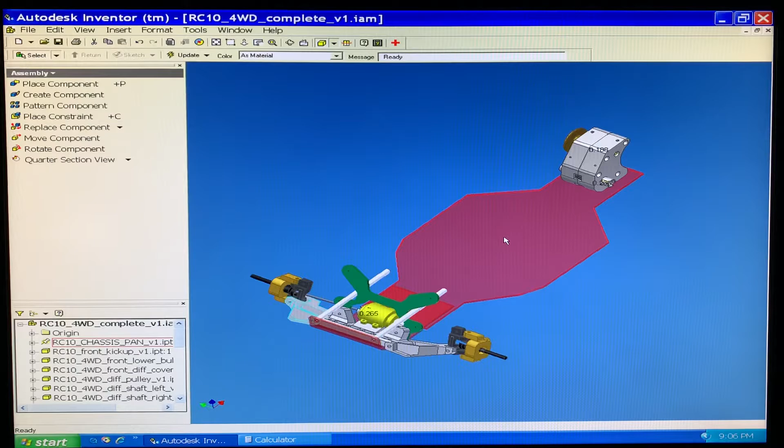As you can see, I've got a kind of mock-up chassis. The dimensions are pretty close for that. You got this front piece here. I tried to get those measurements as accurate as I could. It's kind of see-through there, so we can look through it.

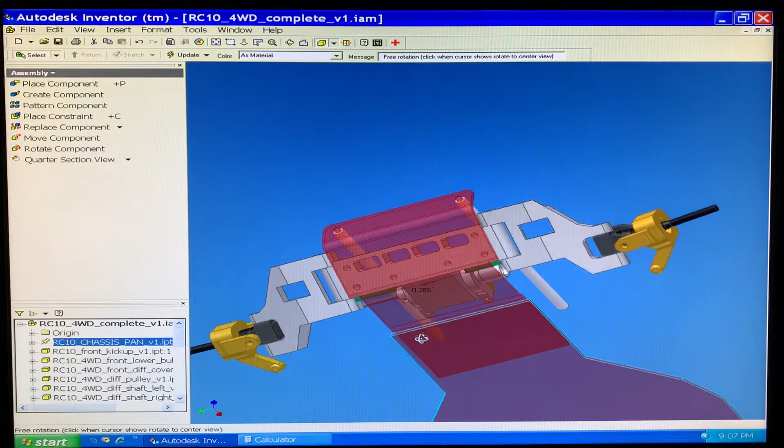So where did we get since last time? Yeah, I guess we didn't have a chassis, so there was just a rear gearbox and a front gearbox at that point. No big changes here. That's all the same. Everything's still in there, haven't done any mods there yet. I think that one's pretty solid.

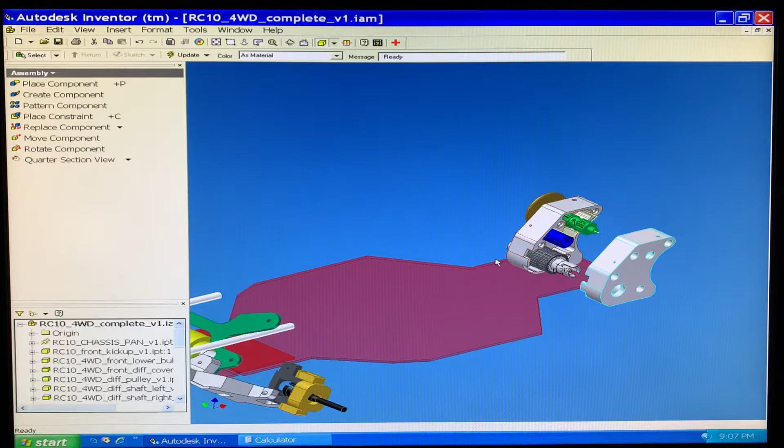Up front, we got a shock tower now, which ends up looking kind of like that weird frog that someone graffitied somewhere, I don't know where, but anyways it just kind of reminds me of that. But yeah, it looks a little crazy because I wanted these to tuck underneath where you would have the upper control arms, and then up top you got obviously the tabs for the shocks.

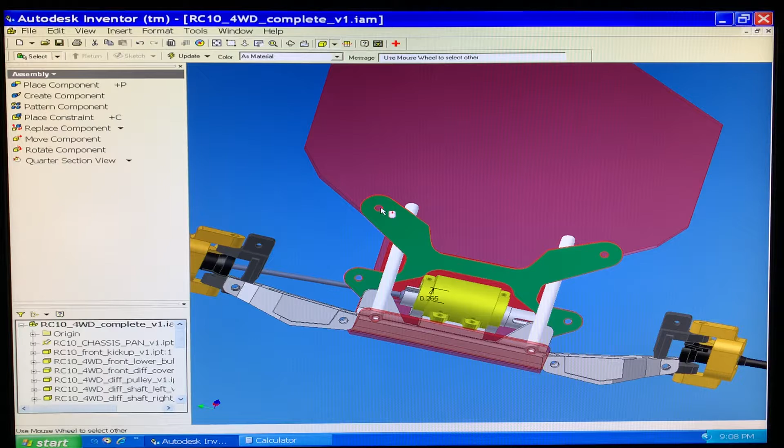These dimensions here, from the distance from the hole to the chassis, are the same as the standard RC10. These dimensions here from eye to eye are the same, so everything should have similar geometry as the standard RC10. These suspension arms are as close as I could get to the real deal dimensionally - from hinge pin to hinge pin, they're the same.

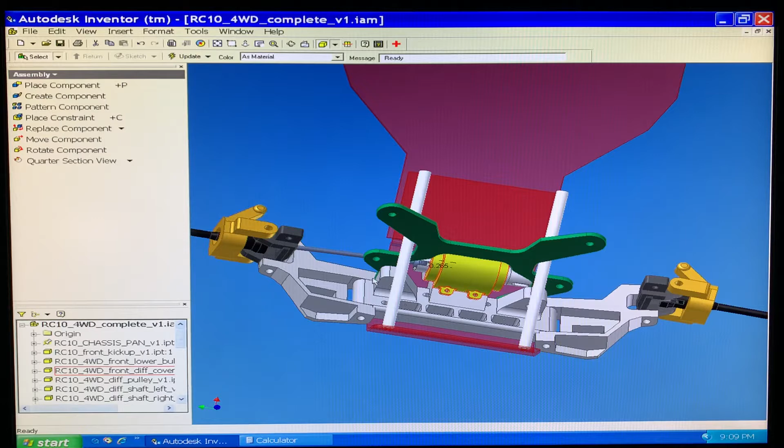So again, I want it to really look like a standard RC10 as much as possible. So I guess really the newest stuff, there's a dog bone in here. I haven't drawn it up with universals at this point because I have a feeling for the prototype I'll just have to go with regular dog bones. You know, obviously you would prefer universals, but at this point I'll probably stick with those.

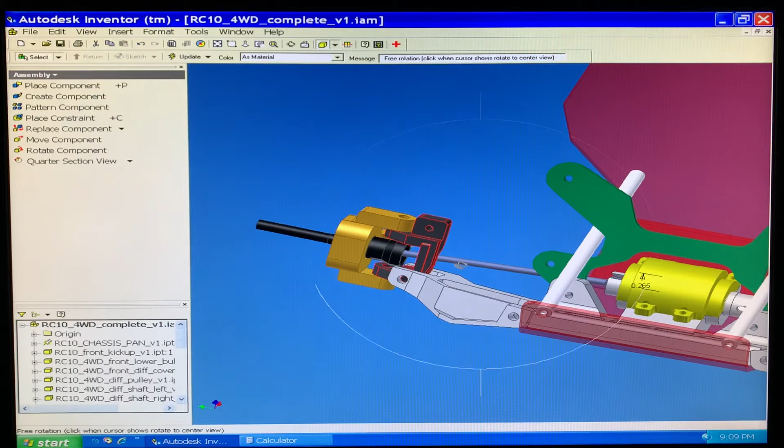But really the main thing I've done now is work on, I guess we're gonna call these uprights. So this piece in black here, that is very similar - whoa sorry dudes, I just put my computer to sleep, sorry about that, wrong key - that piece is almost identical to the original knuckle there, or upright. The only difference is there's this notch cut out so that we can have a dog bone or universal go through it.

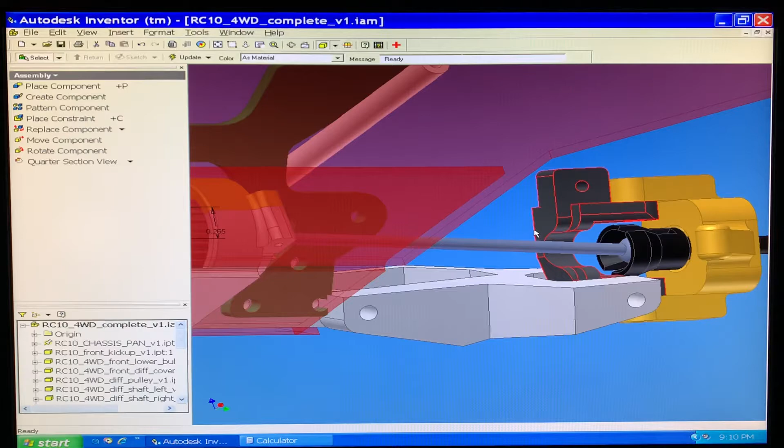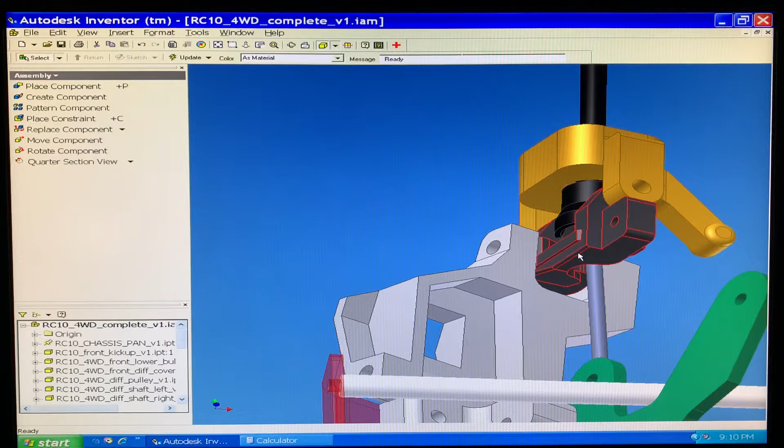I had to beef it up on this side and on this side on the front as much as I could. I added as much material as possible so that it wouldn't start to rub this guy at all, but kind of thicken that up because there's a lot of material missing now from that. Otherwise, it's all the same - the dimensions overall are the same.

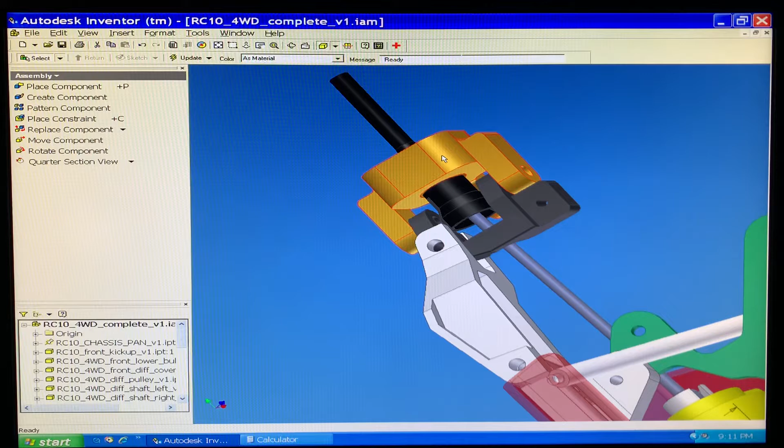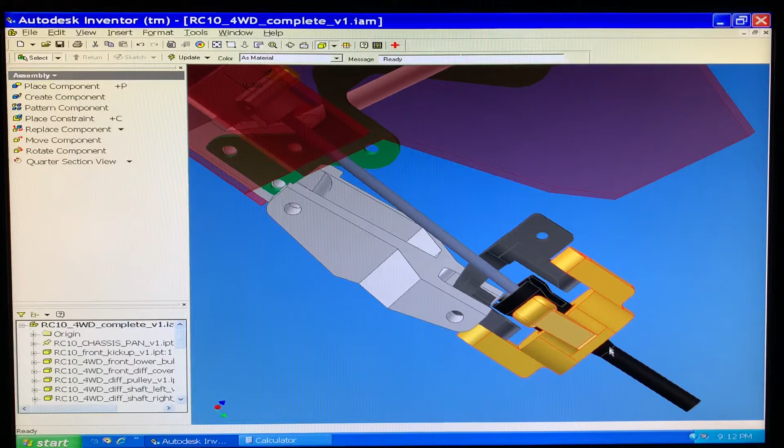This wheel shaft, I borrowed that from - I feel like that is from the front of a Rocky. So these are metric, I think it's a 4mm shaft. It's set up for standard Kyosho bearings from back in the day, can't think of the size right now, don't know if we'll keep it that way. I really wanted to utilize bearing sizes that would come standard with the RC10, and I may still do that, but for right now I actually have some of those, so I may keep it at least for the first prototype.

But yeah, anyways, I could move all this around, but this dog bone is gonna jump all over the place if I do.

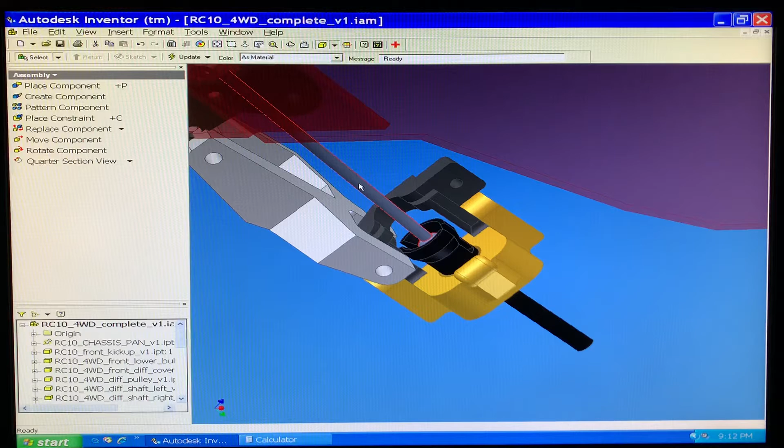This software gets a little bit weird with - whoops, yeah, it's just like wanting to float off. Some of these, when you add some of these constraints, and then you go and try to move stuff around, you get some pretty weird effects.

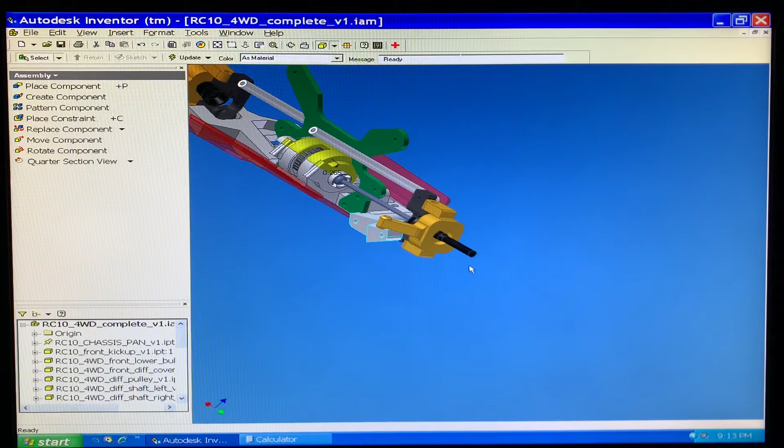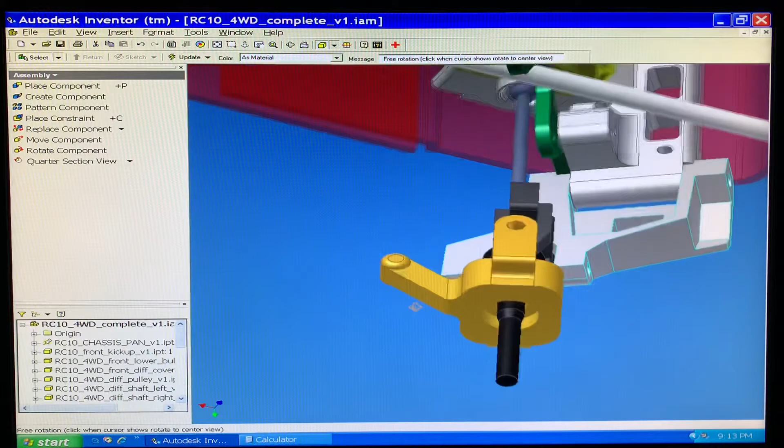Yeah, it's kind of gimping out. But anyhow, it looks like there's plenty of clearance for everything. At least I can print some of these out and put everything together, and then we'll find out where all the problems are. There's a lot going on here, a lot of subtle angles and clearances that are going to be important, that as perfect as I could try to draw it, they may not match real life.

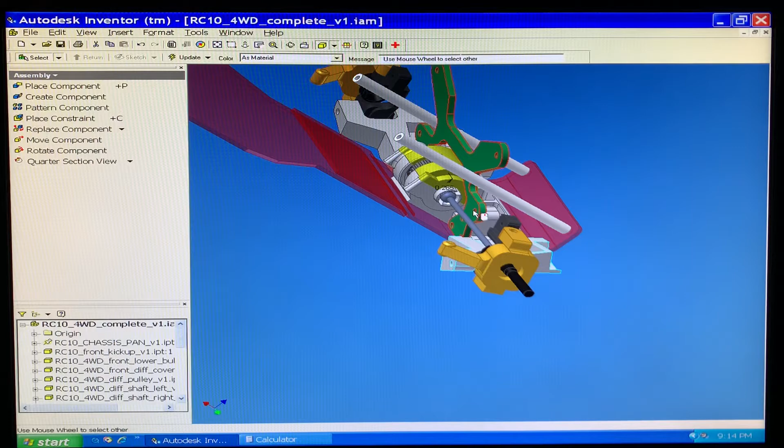So anyhow, that really is what we've done to date. I've got a cutout, I think I can still move that without anything freaking out. Cutouts on the top and bottom diff housing. Oh, that's, yeah, check that out. It's so weird.

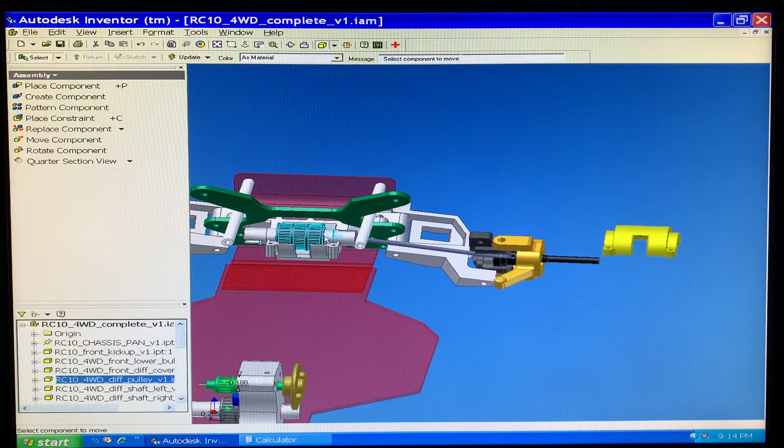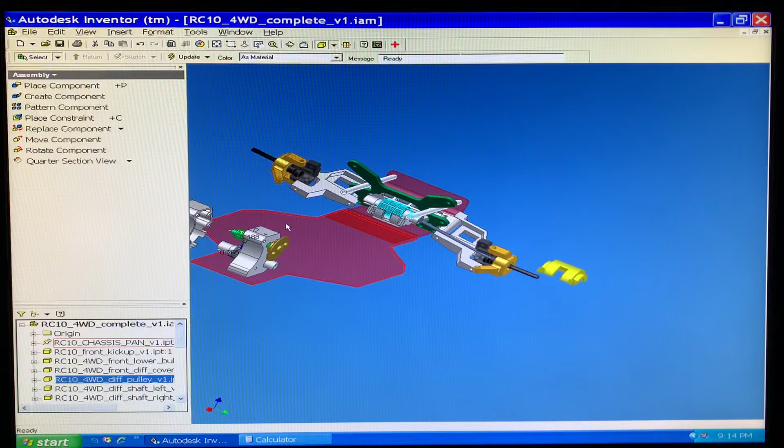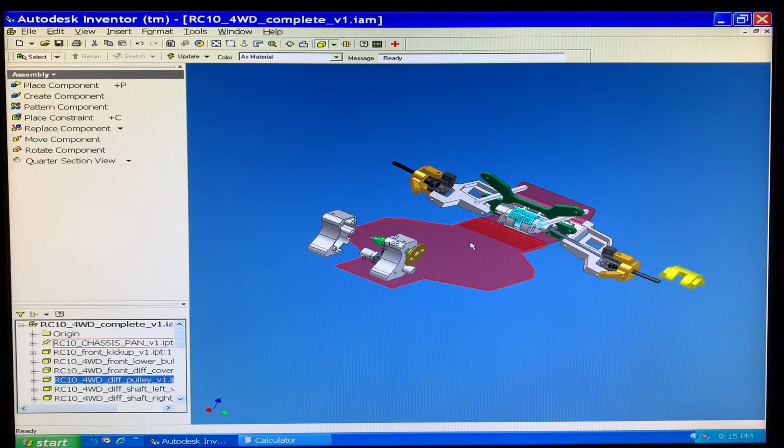But yeah, so for the belts, the major missing pieces right now are a belt tensioner and then the steering. And I think that there's still plenty of clearance for the steering here. Obviously, we may go with a weird arrangement for the batteries, because you're gonna have a belt going right through the center of the car. So I don't know if I'll go with a saddle pack or saddle configuration or stick packs or whatnot. But also normally the steering servo is chilling out right in here, so that's gonna have to move as well. But we'll see. I expected to have way more trouble with all this well before I ever got this far.

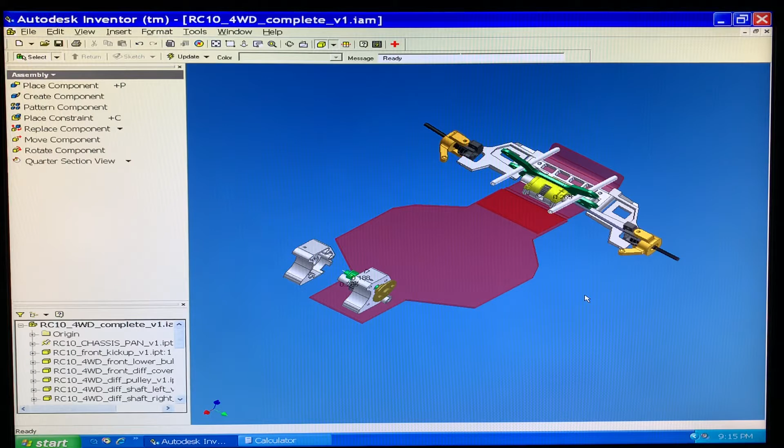I feel like I'm probably being a little overconfident at this point, because it hasn't been as bad as I thought, although it has taken me 2 solid weeks of work just on CAD alone. And again, I don't know how these diffs that I came up with are gonna turn out. They're probably gonna be garbage, but yeah, so I'm gonna order some parts now, and we'll start trying to put this thing together. And next video will be on that.

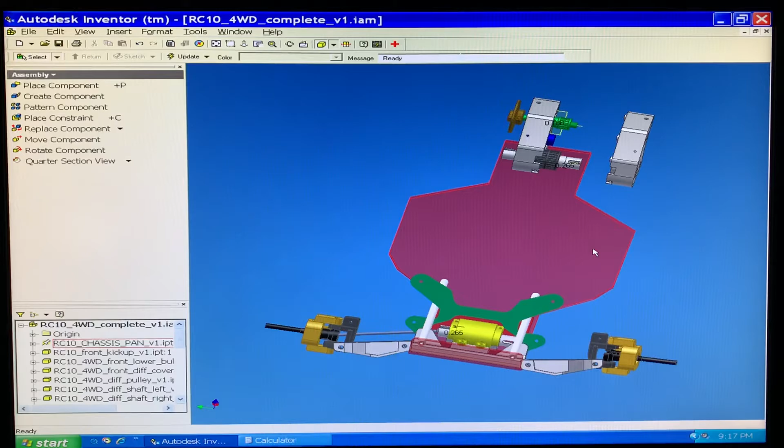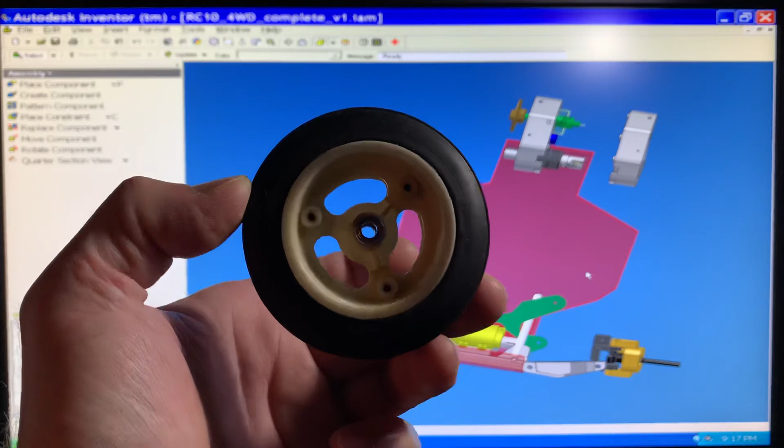This is a front wheel, and you can see it's got just little space for bearings. What I was thinking about doing is keeping this back. It's a two-piece wheel, or at least two pieces. This guy here screws on to the front part. I'm just gonna make a new front part. It's the technical term. Where did it go? Oh boy, I had a - this may not be a 12 millimeter hex, but use your imagination.

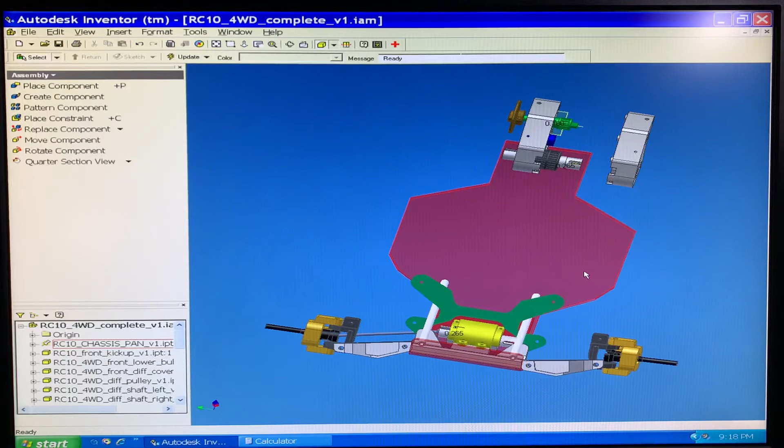Wow, this lighting is so bad. Not only that, but I can't even find it. Yeah, we all know what one of these guys looks like. Our plan is to just modify the front half of a standard RC10 wheel to accept a 12 millimeter hex.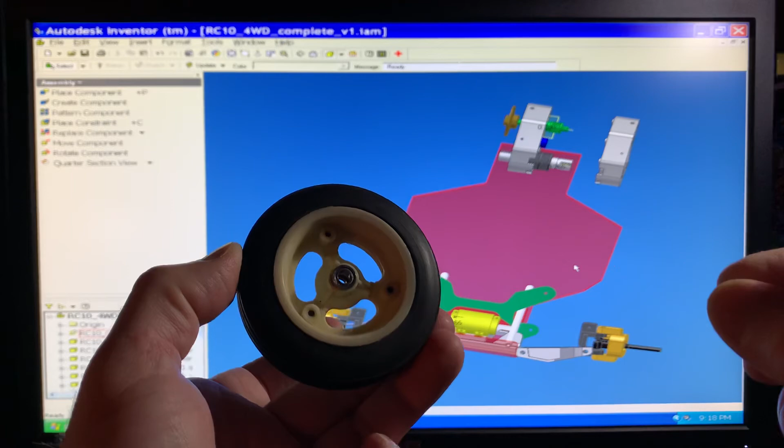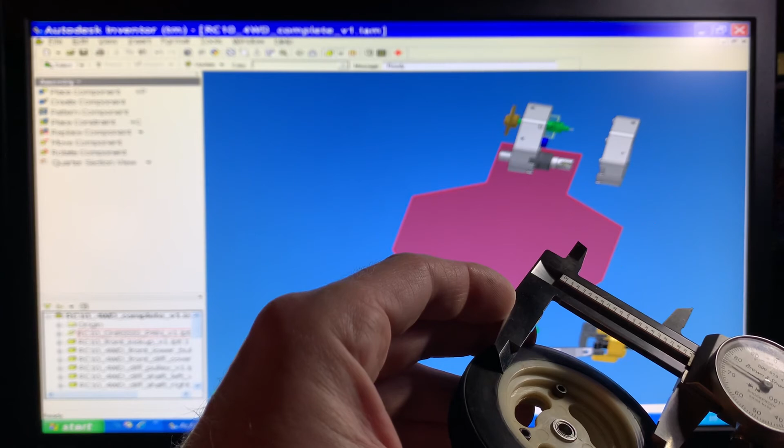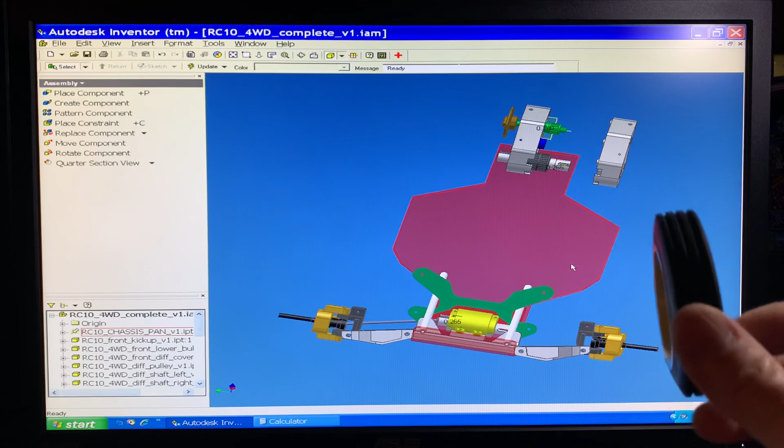Is that crazy? Because I want to say that you got less options on tires for this wheel because it's pretty small. I think it's 1.9 inch diameter. I guess I could actually measure that, but yeah, I think the tire diameter is 1.9 inches. They're running a little small. So I don't know if it would make more sense to go to a larger, more modern wheel, or to try to keep this kind of like, just run a little spike front tire using the original dimensions for the RC10.